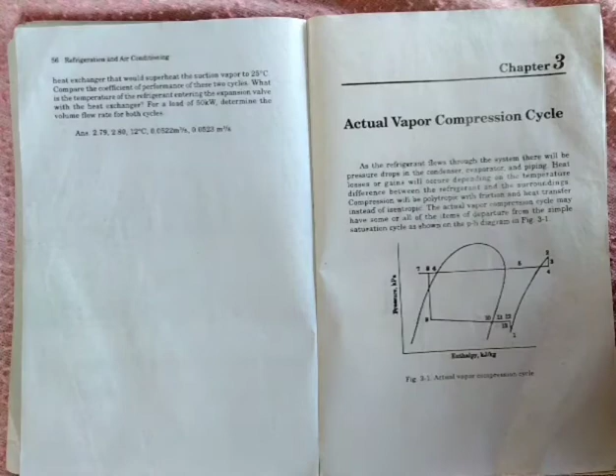So dito na tayo sa actual vapor compression. Dito guys hindi na siya ideal, actual na siya dito, hindi na isentropic process kundi polytropic na yan.

Dito sa may discharge valve ng compressor, merong magkakaroon siya ng pressure drop from 2 to 3. Dito guys sa may condenser hindi na siya straight, kasi nga may mga pressure drop.

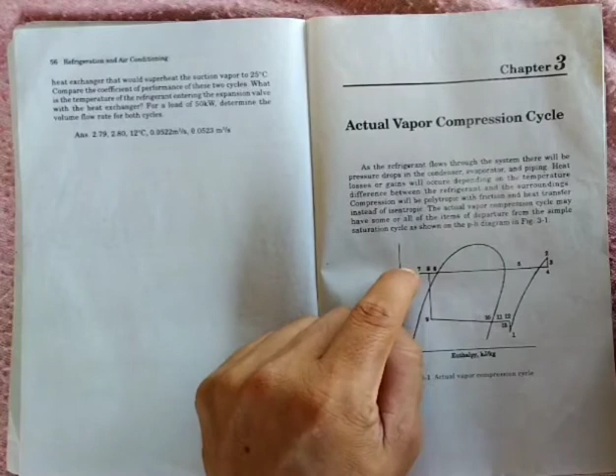So sobra na siya, hindi na siya tulad ng dati na nasa liquid line, subcooled na siya. Dito pa meron pang change of temperature, kaya hindi na instead na 7 diretso na, meron pa siyang 8, kaya bumaba na siya na ganyan.

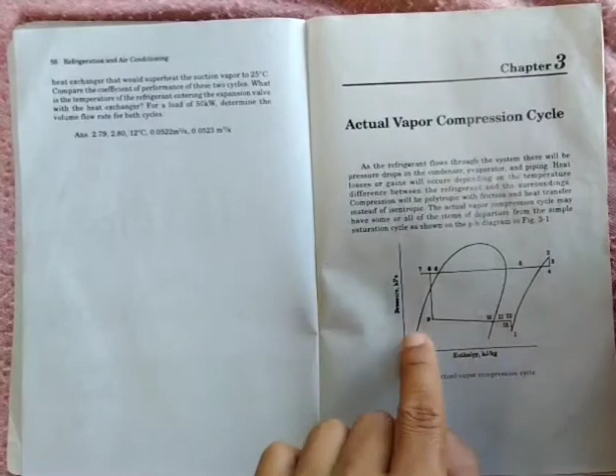Dito sa may lines nito ay may mga losses pa, hindi na rin pantay yung ating pressure, instead na pressure 9 is equal to pressure 10, hindi na, kasi nga merong mga pressure drops. Dito meron ding pressure drop sa may suction.

Walang tawag dito sa sasakyan is kailangan na i-maintain yung compressor natin.

Meron siyang water jacket guys, para yon ay maiwasan na mag-overheat yung compressor, kasi nga ang bakal kapag lumalambot yan, kapag uminit lumalambot, which is magkakaroon ng explosion o kaya pagkasira nung cylinder, o kaya yung piston liliit o kaya lalaki.

So yun yung tulong ng water jacket guys. Bale iikot yung water sa kukunin niya yung heat sa compressor.

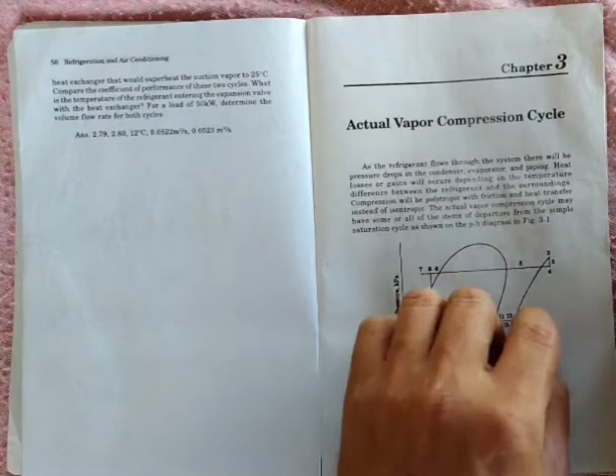So meron din itong guys, tawag nito radiator. Kumbaga meron siyang radiator kung sa sasakyan.

Tulad nga nito, alam kong may book kayo, pakibasa na lang to. So actual na yung nangyayari. Madali lang ito.

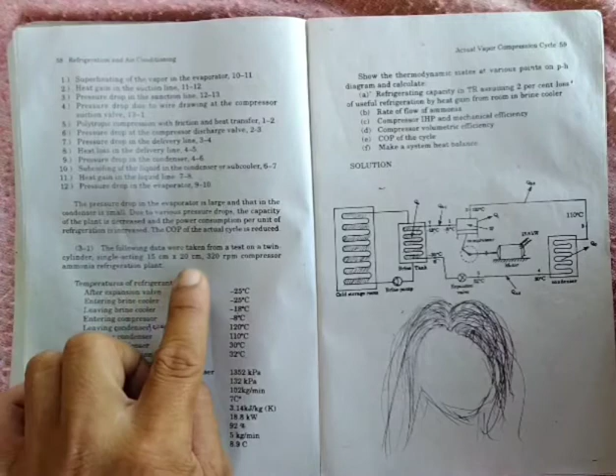Sa problem na tayo, meron daw 15 by 20 cm na single acting, tapos dalawa, twin cylinder, and then ang revolution per minute niya ay 320, and then ang refrigerant ay ammonia.

So after expansion valve daw, negative 25. Ito after expansion valve, negative 25.

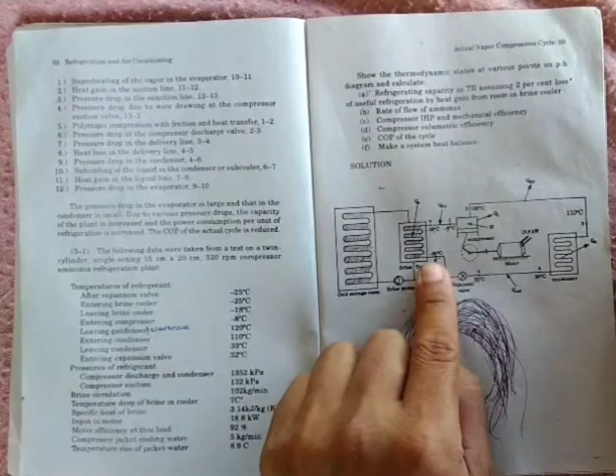Ang ikot niya guys is ganito. After expansion valve is negative 25. Entering the brine cooler is negative 25 pa rin.

Leaving the brine cooler is negative 18 na. Nung pumasok na siya sa evaporator, naging paglabas niya is negative 18.

Then nung nag-travel pa siya sa mga pipings, nag-loss, naging negative 8. Parang tumaas yung temperature kasi nga due to surrounding siguro.

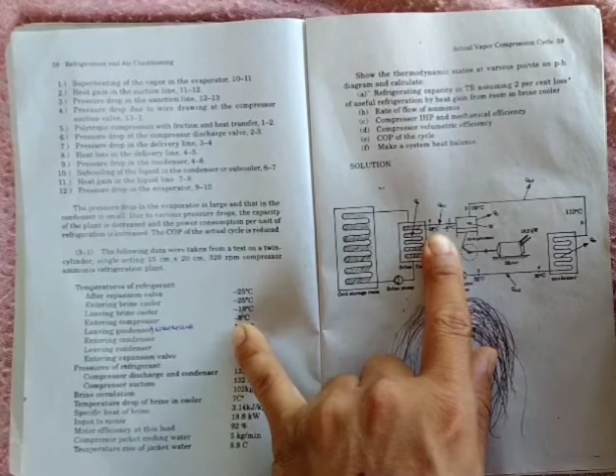So negative 8. Pagpasok niya sa compressor, negative 8 degrees Celsius na siya. And then leaving the compressor, hindi to condenser guys, compressor.

Leaving the compressor is 120, ito. Tapos pagpasok niya sa condenser is nagkaroon din ng heat loss, naging 110.

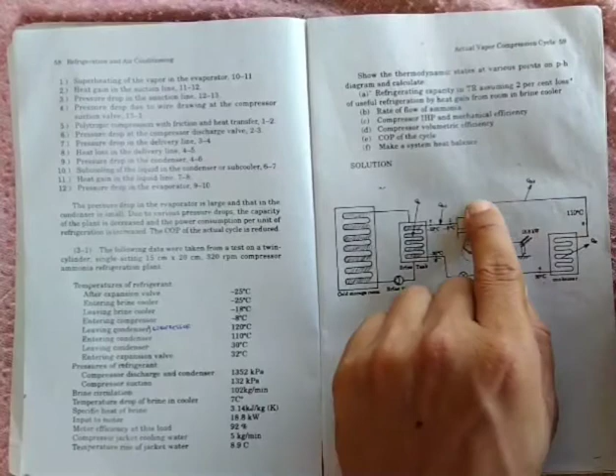And then leaving the condenser is 30 na. Pero nung pagpasok niya ulit sa expansion valve is 32 degrees na.

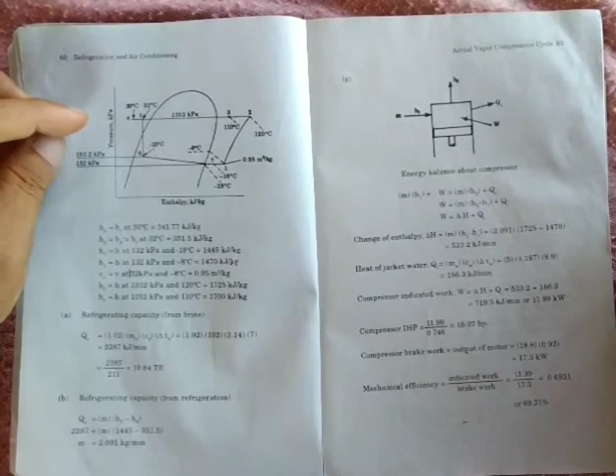So ngayon dito na tayo sa ito na yung pressure enthalpy diagram niya. So from here,

Ito yung negative 25 after expansion valve.

Start tayo from paglabas sa expansion valve is negative 25. Tapos paglabas sa brine cooler naging negative 18 na siya. Pero nung pagpasok na niya ng compressor guys is negative 8 degrees na.

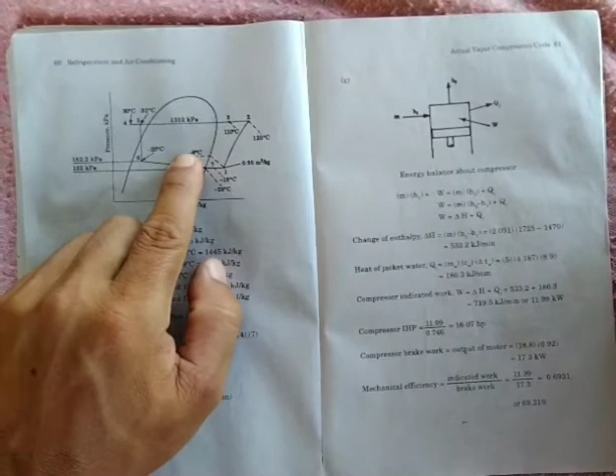And then paglabas sa compressor guys is 120 degrees Celsius. Tapos nung sa condenser na guys, naging, pagpasok niya sa condenser, naging 110. And then, paglabas ng condenser is 30.

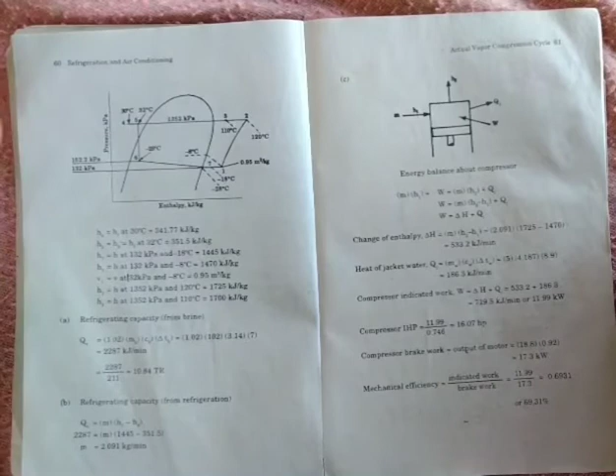Then, due to sa pipe loss, yung pagpasok niya sa expansion valve is 32 degrees Celsius na lang. So, ngayon, kunin na natin yung data sa libro natin.

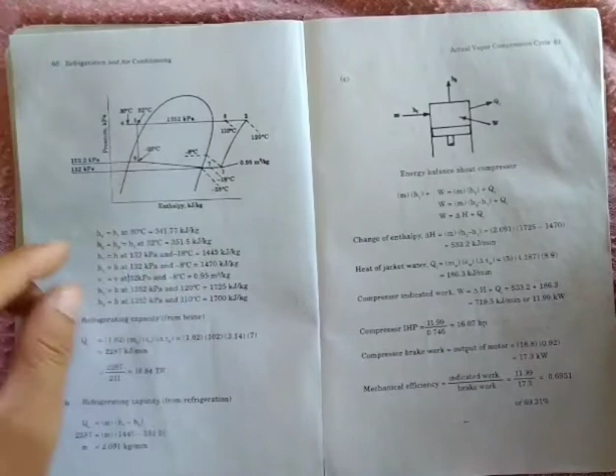So dito, H4 is, madali nila, HF at 30 degrees. Check nyo na lang. Ang makukuha nyo is 341.77 kJ per kilogram. Yung H5 is equal to H6 at 32 degrees.

Kunin nyo yan, 351.5. Yung H7 is H at 132 and negative 18 degrees.

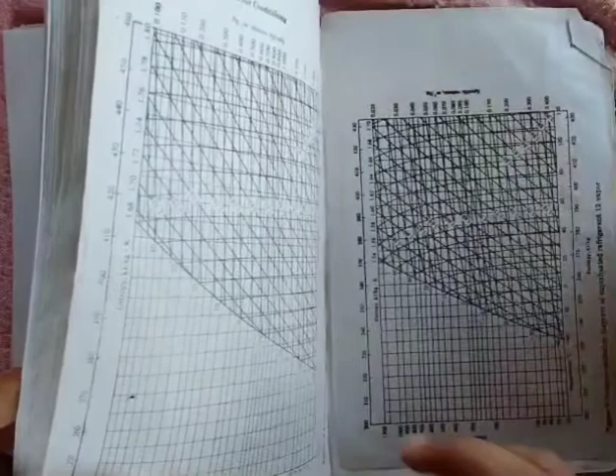Tingnan nyo na lang yung sa may H7 at 132 kilopascal and then negative 18 degrees Celsius. Ayan. Yung 132 is given naman.

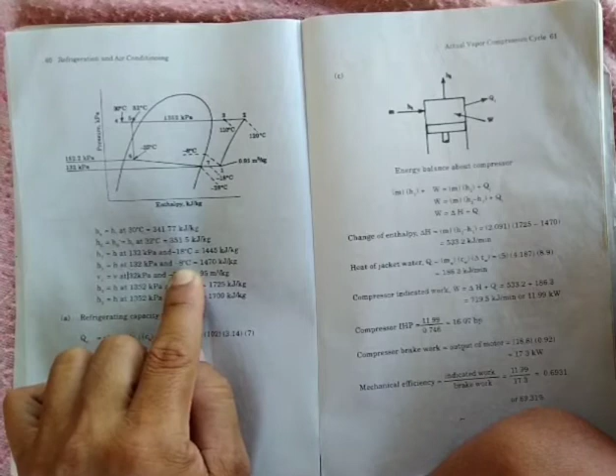Of course, din sa H1, kunin nyo rin yung 132 sa chart. Then, yung intersection niya ng negative 8. Makukuha nyo ang 1470 kJ per kilogram.

So, of course, kailangan natin yung V1. Volume at 132 and negative 8 degrees, kasi nga ito na yung papasok sa compressor. Hindi ito. Tingnan nyo na lang ha, pansinin nyo lang yung entering tsaka leaving. Kapag entering sinabi niya, doon kayo mag-start.

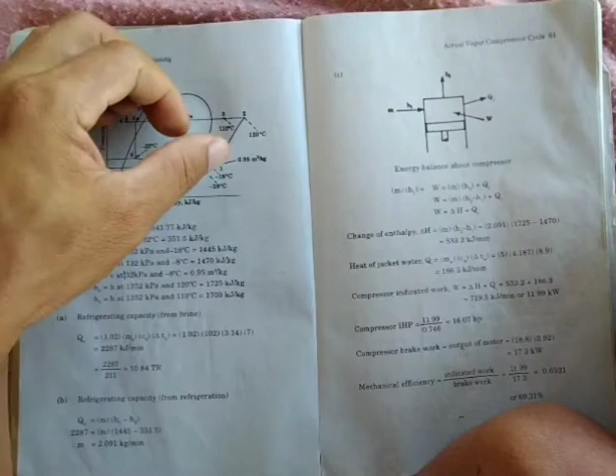Yung leaving, doon din. Leaving minus entering tayo. Halimbawa, compressor work, leaving minus the entering. Kung H ang pinag-usapan, sa heat rejection naman dito, leaving minus the entering din. So ang leaving, halimbawa dito sa condenser, ang leaving niya is 30, ang entering niya ay 110. So ang gagawin nyo ay H4 less H3, hindi H2. So aware lang kayo sa leaving and entering, leaving and entering lang tayo.

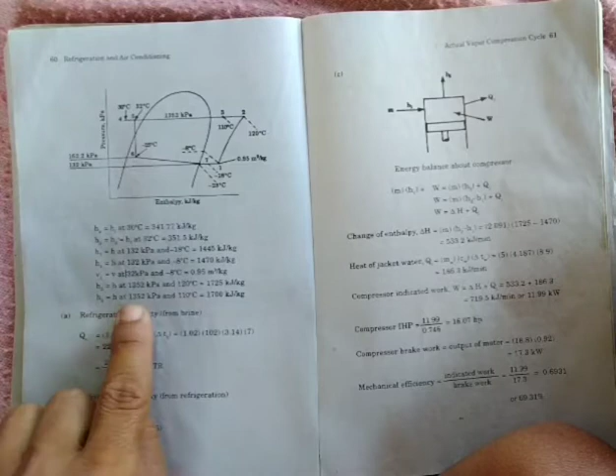So dito guys, refrigerating capacity. H3, okay na to. H2 is sa pressure ng 1352 kilopascal, and then yung 120, kunin yung intersection, makukuha nyo is 1725. Yung H3 naman, kunin nyo rin yung intersection ng 1352 and 110, makukuha nyo ang 1700 kJ per kilogram.

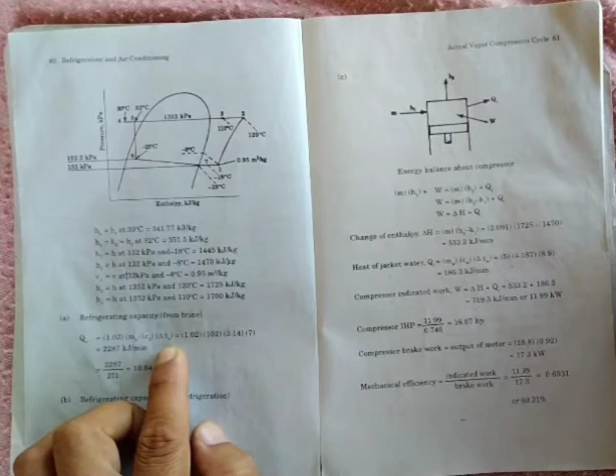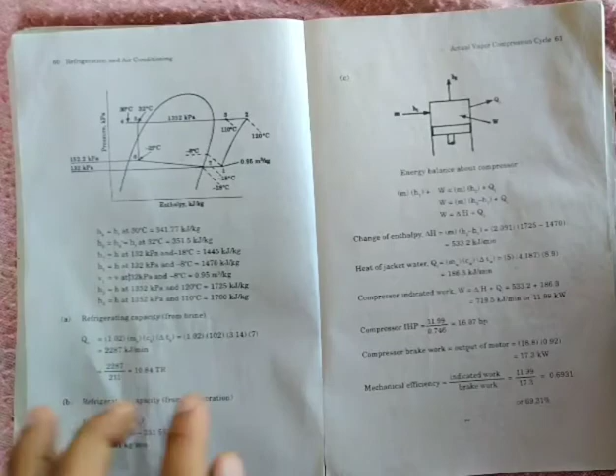Okay, yung brine circulation to 102, yung 3.14 yun yung specific heat ng brine, tsaka yung temperature difference na yung 7 guys. Nakalagay naman dito 7 degrees, yung temperature drop of brine in cooler is 7 degrees. So ang makuha nating ref effect or refrigerating capacity is 10.84 tons of refrigeration.

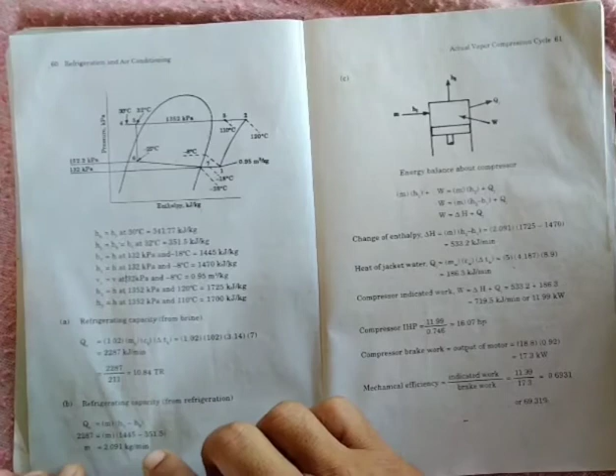So since meron na yung capacity natin, ito yung brine, ito naman kunin naman natin, yung QE ng brine is equal to QE ng refrigerant. So ang katapat niya guys is yung, solve muna natin yung mass flow rate ng refrigerant. So tingnan natin dapat entering, leaving minus entering tayo. So dito tayo sa QE sa refrigerator, sa evaporator pala.

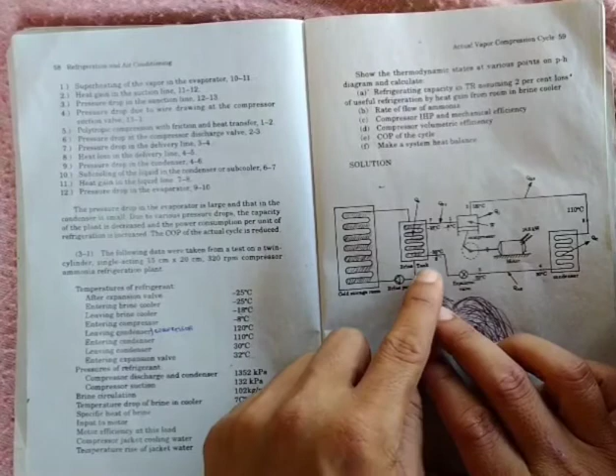So dito guys, ang ating leaving, dito tayo sa evaporator. H7 less H6 kasi nga entering ang negative 25, leaving ang negative 18. Kaya sinabi niyang H7 less H6. So ngayon, direct substitute nyo, makukuha nyo yung 2.091 kg per minute.

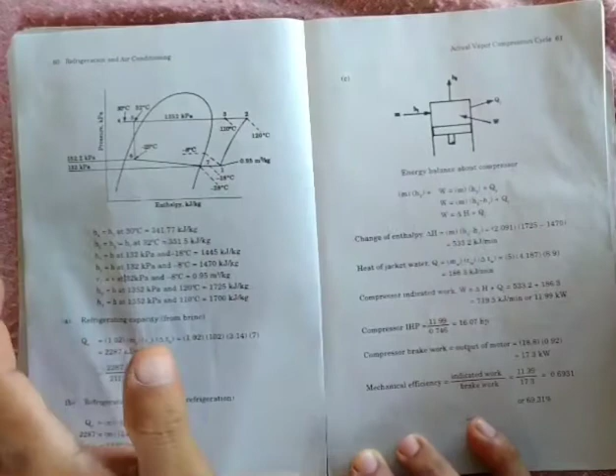So dito naman tayo sa balance, dito heat balance ng compressor. Ang papasok guys is yung H1. Of course, meron tayong work na papasok, yung mechanical work mo ba yan o electrical work. So papasok. Ito guys, may tumatakbong tubig dito, yung loss. And then after that yung point 2 na.

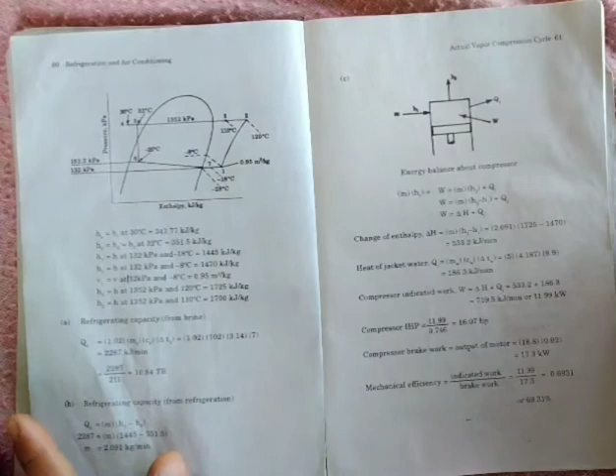So ngayon, may given, tingnan natin yung given, yung QJ. Ay hindi siya given, isa-solve pa. So the change of enthalpy is mass H2 less H1. So solve pa natin yung delta H. Ang delta H natin, itong H2 less H1 is 533.2 kJ per minute.

So direct substitute na lang yan. So ngayon yung jacketed naman is mass of water, yung specific heat ng water, and then the change of temperature ng water. Yung flow na given naman tong mass flow rate ng water na 5 kg per minute, and then ito naman yung i-memorize nyo na to, 4.187, ito na yung specific heat of water.

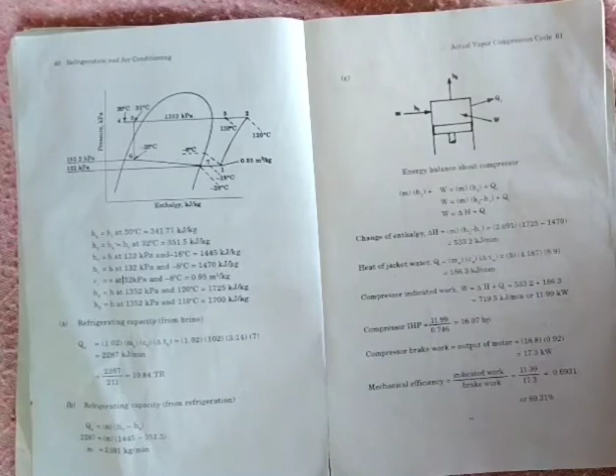So given naman tong 8.9, ito na yung change of temperature. So makukuha nyo na is ang QJ natin, yung nawawalang heat is 186.3 kJ per minute. So ngayon, ang work na masosolve natin is delta H plus QJ. So meron na kayong nasolve nyo na, 719.5 kJ per minute.

Or 11.99 kilowatt. So itong compressor indicated horsepower is kukunin nyo lang yung work, i-divide nyo siya sa efficiency, i-convert lang naman into horsepower, kilowatt horsepower. This is a little bit conversion lang naman.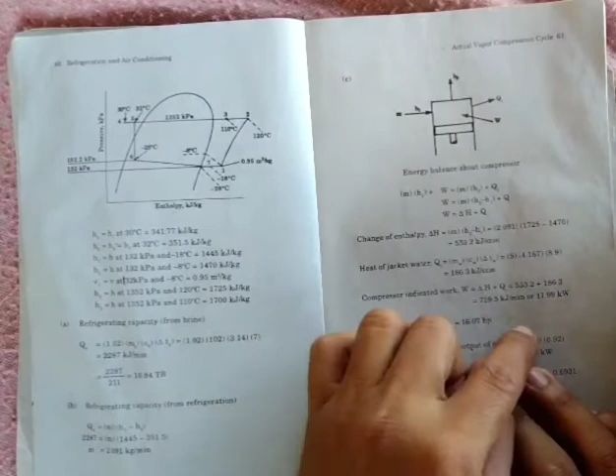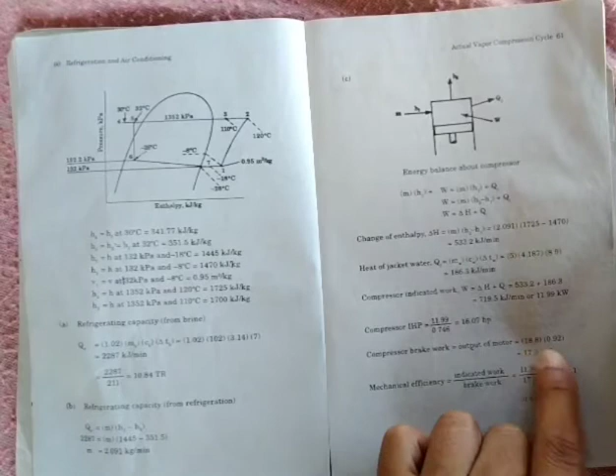So yung compressor brake work is i-multiply nyo lang yung output times yung efficiency. Ito naman guys is 18.8 is given naman to, ito na yung input ng motor. So ang brake work natin is 17.3. So kapag titingnan natin yung mechanical efficiency, ang formula niya is indicated work over the brake work. So ngayon, yung 11.99 over the brake work is 69.31%.

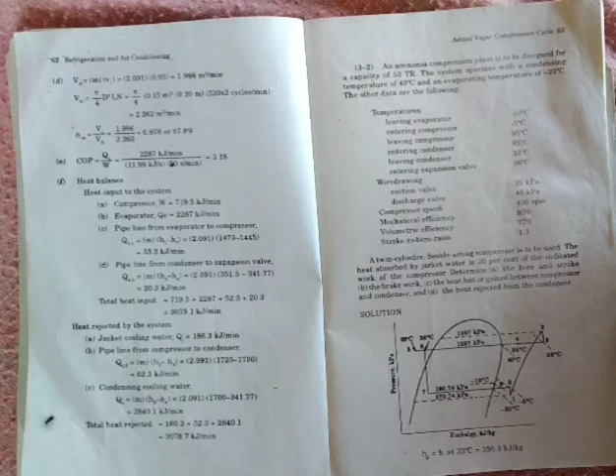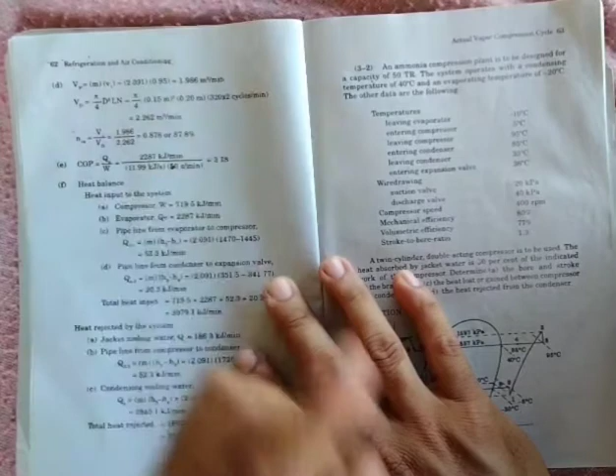So dito naman tayo sa volume flow rate ng ating para ma-solve natin yung volumetric efficiency, which is V1 over VD. Dito meron na tayong nakung V1 kanina, yung mass flow rate meron na, 1.986 meter cube per minute, and yung volume displacement is madali lang, pi over 4d squared. Given naman tong diameter tsaka length ng ating cylinder, and then yung 320, yun yung RPM niya. Dahil nga twin cylinder, so times 2 tayo. So ang makukuha nating VD is 2.262 meter cube per minute. And then yung actual volumetric efficiency na is V1 over VD, kaya 87.8%.

Yung coefficient of performance naman is QE over work. So 3.18 ang COP natin.

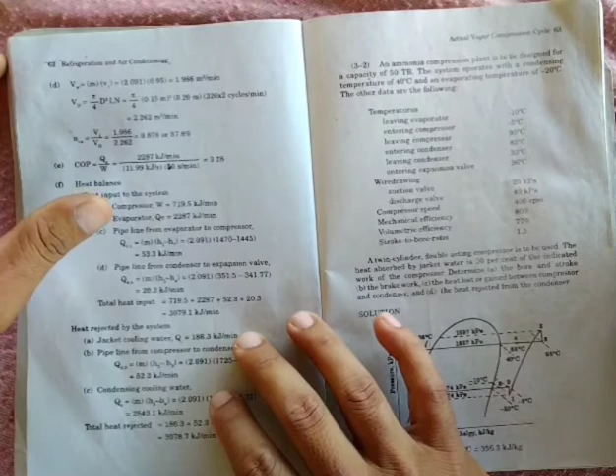Okay, the heat balance. Sa heat balance tayo, heat balance, heat input system. Okay, compressor work, evaporator, pipeline from evaporator to compressor. So madali lang to guys. Itong sa pipe naman, yung mga heat balance, heat input to the system.

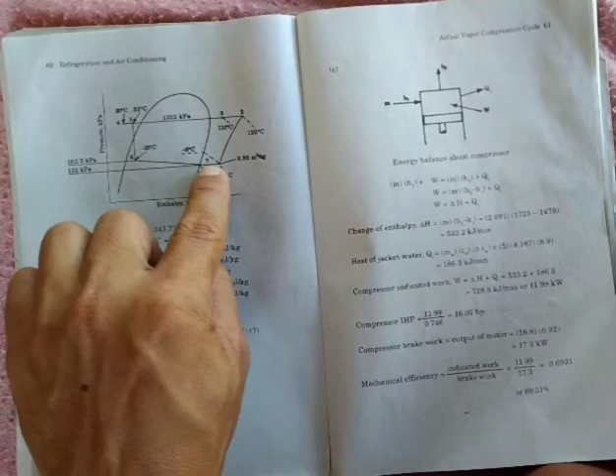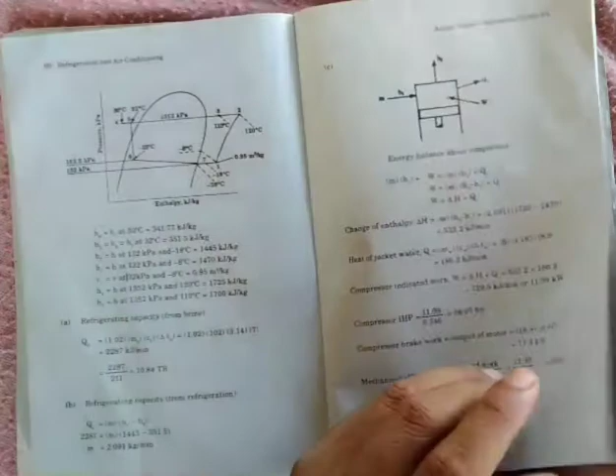H5 less H4, there are changes there, heat entered there. So for the total heat input, just add them all up, A B C D. So the total heat input in our system is 3079.1 kJ per minute.

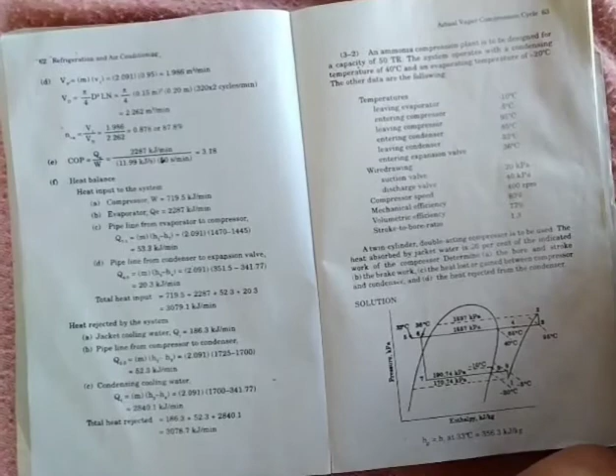The heat rejected is of course what was rejected in the compressor, what was lost. This is the pipeline from compressor to condenser, rejected because it decreased. And this is the condensing cooling water, the heat rejected by our condenser.

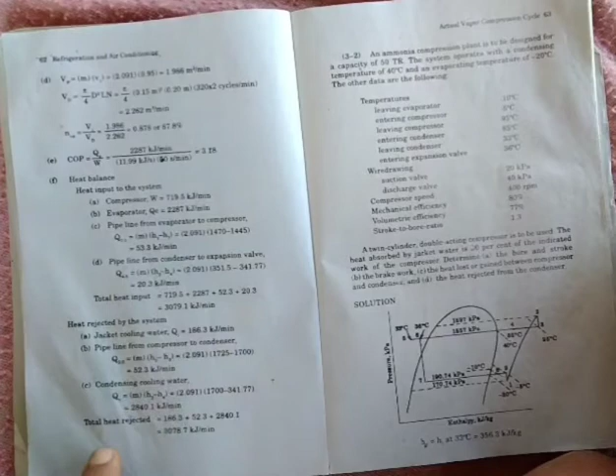So that's it, and then total heat rejected, just total it up. So that's it guys, that's it. I hope you understood, and then I'll set another example. So thank you.

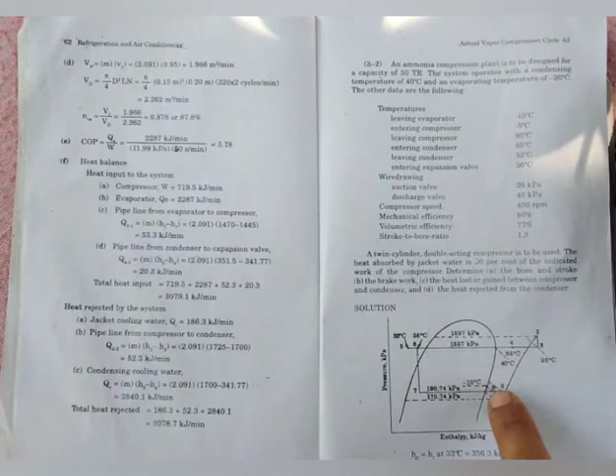Okay guys, here in 3.2, continuation of the actual vapor compression, this one is different. Here at point 2 it already drops. There's a pressure drop in the compressor, at the valve. Then here too, at the inlet, there's also a pressure drop.

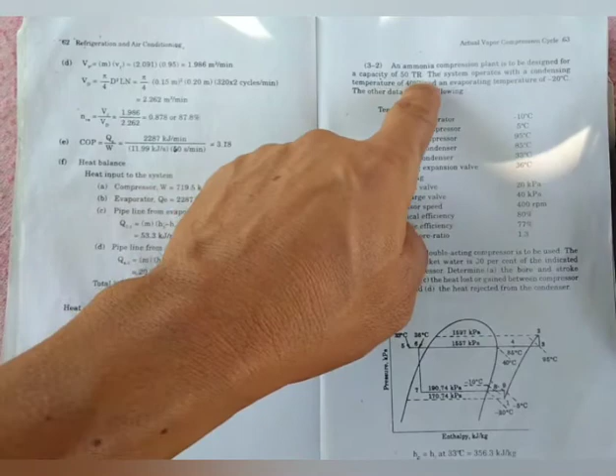So now, it says here the system has a capacity of 50 tons of refrigeration. It operates at a condensing temperature of 40, and the evaporating temperature is -20. The data are the following.

So first, let's locate the condensing temperature and the evaporating temperature. So let's look at the corresponding pressure for these, -20 and 40 degrees Celsius.

So, 40 degrees is 1557 kilopascal. And -20 is 190.74 kilopascal.

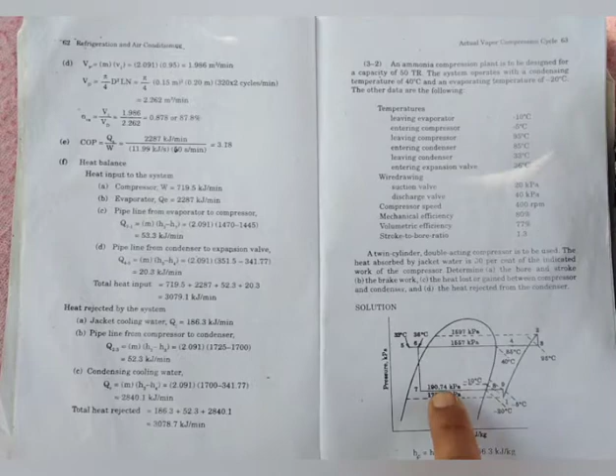So for the conditions on temperature, it says here that after leaving the evaporator is -10. So when leaving the evaporator is -10, okay, it's here. Leaving the evaporator, so here, at this point.

And then entering the compressor is -5. So it heated up, from -10 to -5. So it's here, but notice, it's still straight, right? Still constant pressure. But the temperatures are what change.

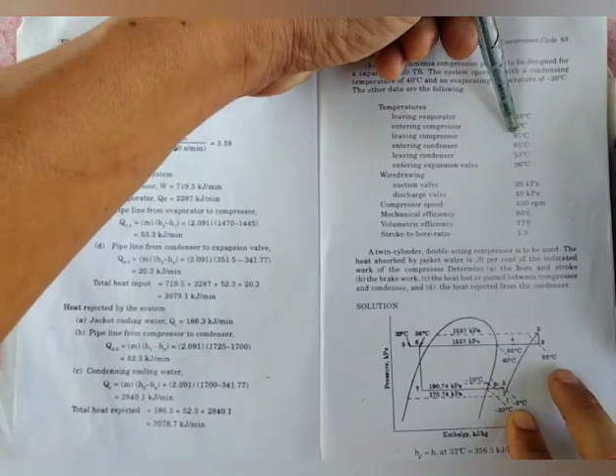So leaving the compressor is 95. Okay, leaving the compressor. Leaving the compressor is 95.

Then entering the condenser is 85. So this is the condenser. Entering the condenser is 85, leaving the condenser is 33. So here, 33. And then entering the expansion valve is 36.

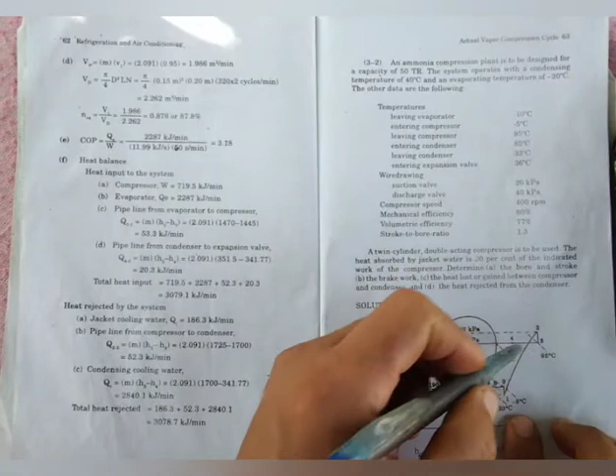But notice, since this is a pressure-enthalpy diagram, 2 to 3 is straight across, so H2 is equal to H3. H1 is equal to H9, they go straight across.

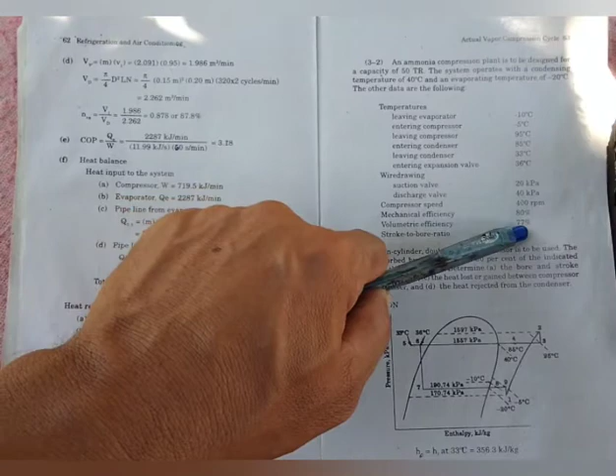So compressor speed is 400. The mechanical efficiency is 80%. Volumetric efficiency is 77%. Then the ratio of stroke to bore is 1.3. It's a twin cylinder, then double acting too. So twin is 2, then double acting times 2.

The heat absorbed from the jacket is 30% of the indicated work. So you just multiply by 30% once you get the work of the compressor.

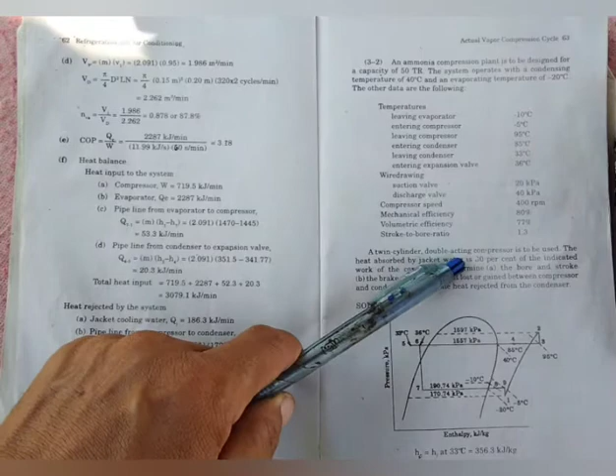So we're at H5, guys. Numbering it. So wait a moment.

So here at H5, since H5 is here, just take the HF at 33 degrees. So 356.3. H6 is equal to H7, which is HF at 36. So they're here.

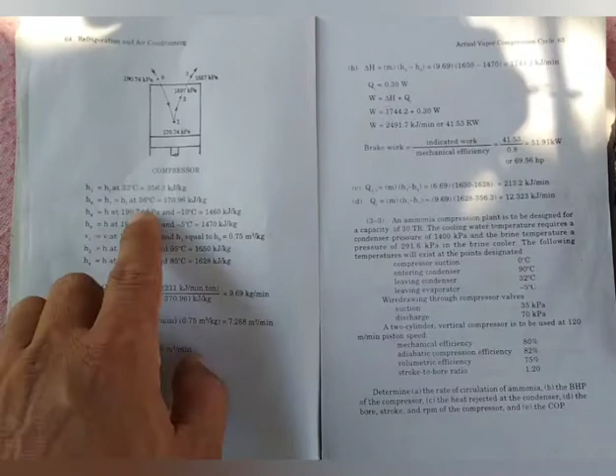H7, then H8 is, H8 is negative 10, leaving the evaporator. So negative 10 is the leaving the evaporator value.

And then for H8, take 190.74 and negative 10 on the diagram, on the chart. So take the intersection, you'll get this, 1460.

For H9, entering the compressor, look at the enthalpy of 190.74 and the intersection of negative 5, you'll get this, 1470. So we need V1, still, since what's entering is...

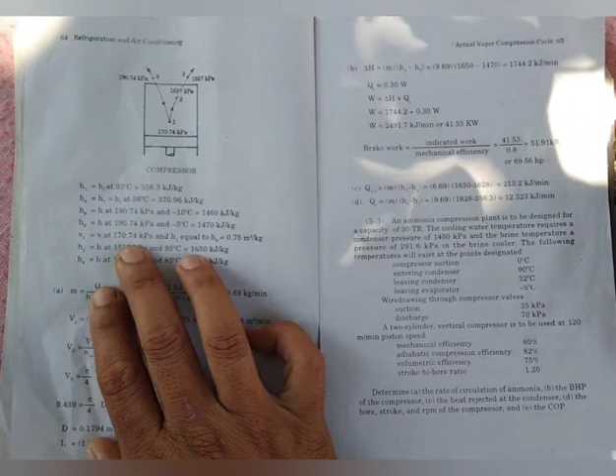So now you take V1 at 170.74 and H1 is equal to H9, 0.75. So H1 is equal to H9, guys. That's it, right, there was a wire drawing.